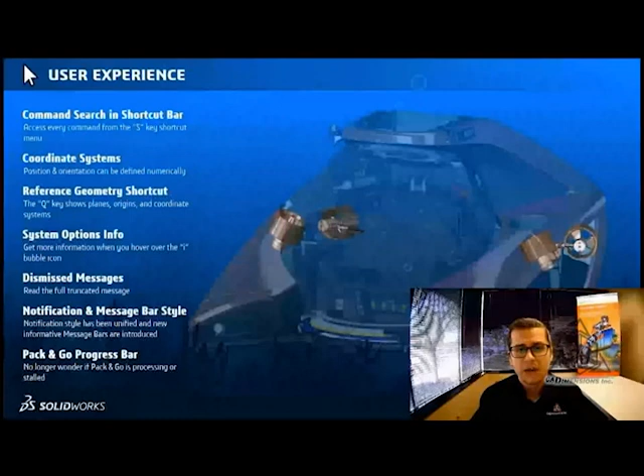SolidWorks 2022 user experience enhancements focus on increasing productivity and usability. In this Nemo submersible model, only one thruster is in place, and we need to accurately place the other thrusters. The S-key keyboard shortcut toolbar now allows us to search for commands, and will even show the tool's location for future reference. We know the location of the thrusters, so a coordinate system would be a great way to mate the new thrusters in place. In SolidWorks 2022, we can now define coordinate systems by numeric input for precise location and orientation.

We have our reference geometry set to hidden so that our workspace is clean. However, easy access to reference geometry is essential. In SolidWorks 2022, a new keyboard shortcut, Q, will toggle reference geometry on. This will quickly give access to assembly or component planes, origins, or coordinate systems.

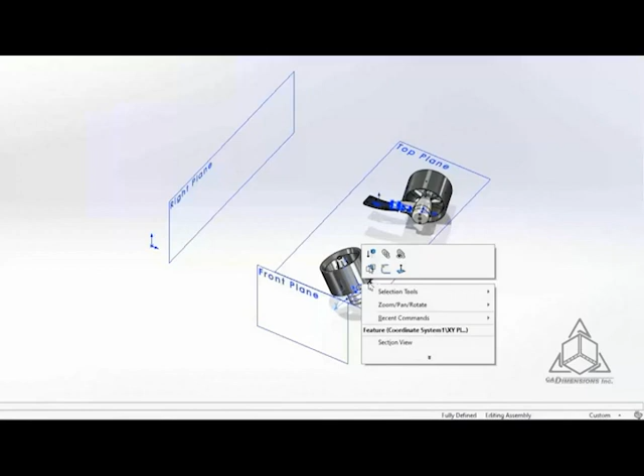Coordinate systems were also updated, visually and functionally. Their axes, planes, and origin points can now be used to create sketches, section views, and other features. Now we need to mirror the thrusters. We can use the S key search bar for the mirror tool, and then easily add it to the shortcut bar for future use. We can also use the Q key while creating this feature to select the mirroring plane.

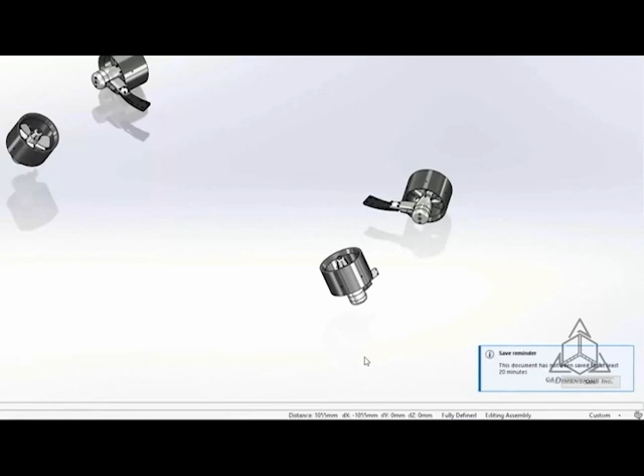The system options have been upgraded with information bubbles that help identify and inform you of the settings function. Dismissed messages have also been upgraded so that you can read the full message pop-up, making it even easier to identify than in previous versions. Notification pop-ups have been overhauled in style and appearance, making them universal throughout the interface. When collecting your project, we always turn to Pack and Go. Now in 2022, there is a progress bar, so we can have a better idea of how long the process is going to take.

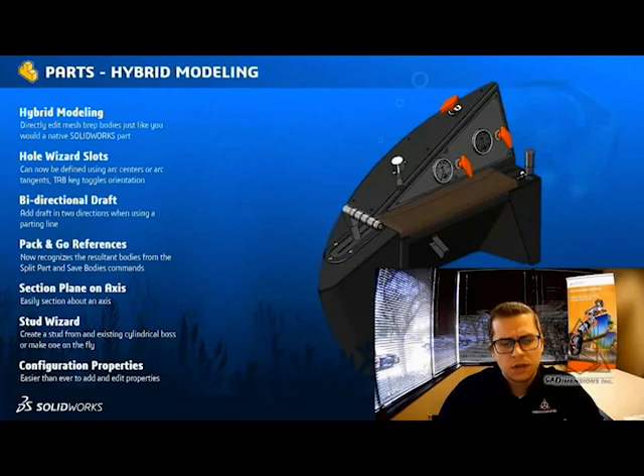And then we get some extra custom property enhancements as well. So let me go ahead and show you how they work.

We're not always afforded the luxury of receiving native SolidWorks files when working with other companies. Sometimes all we have to work with are mesh BREP formats, and in the past this could be tricky at best. SolidWorks 2022 has enhanced the capabilities of working with mesh files, making it easier than ever to edit the geometry.

The ball valve on this current Nemo model needs to be edited. We wanted to make it a bit more fancy for such a luxury product design. You can see the imported bodies are a mesh BREP format, but we can make changes to it as if it was a typical solid model. Creating features like chamfers, extrudes, reference planes, and more no longer require Boolean operations.

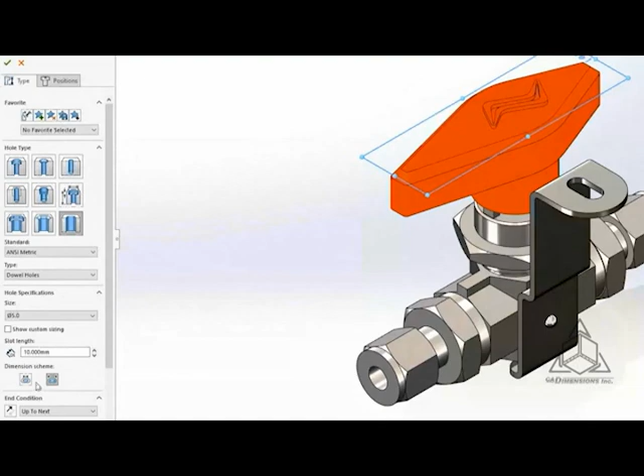Let's add a slot for the lock. The hole wizard slot length can now be defined by arc tangents or centers. Positioning the slot is as easy as using the tab key to change its orientation.

This handle is to be injection molded, so it will require draft. To do this, we will have to create a parting line and add bidirectional draft at that line. In SolidWorks 2022, you can create the bidirectional draft in one feature rather than having to create two parting lines.

Back to the mesh bodies. The manufacturer wants each body as a separate part file so they can access them individually. The Pack and Go function now recognizes the references created with the save bodies and split parts commands. Now you can choose which references you need rather than manually tracking them down in Windows Explorer.

Section views have a variety of uses at each level of the design process. You can now specify a section view from any cylindrical face, conical face, or axis.

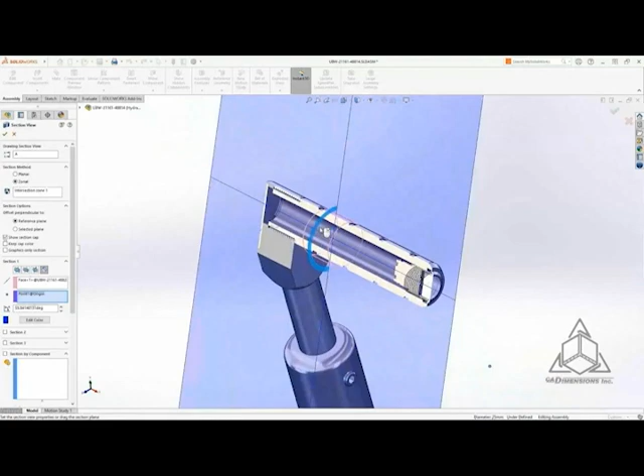These 22mm threads are useful for 3D printing, but are unnecessary for detailing the design for manufacturing. The new Stud Wizard is a great tool for this, as it uses the diameter of the boss and still provides a list of different thread sizes and pitches to use. It even allows you to create an undercut with full control over the dimensions. The Stud Wizard adds cosmetic threads, which look great in 2022, and these can be called out for 3D and 2D annotations.

In SolidWorks 2022, configuration-specific properties have been separated into two tabs, Configuration Properties and Property Summaries. In the first tab, property information is added just like you would expect. Now you can choose which configuration they are applied to using the dropdown. The Property Summary tab provides a useful way to compare configurations based on a custom property.

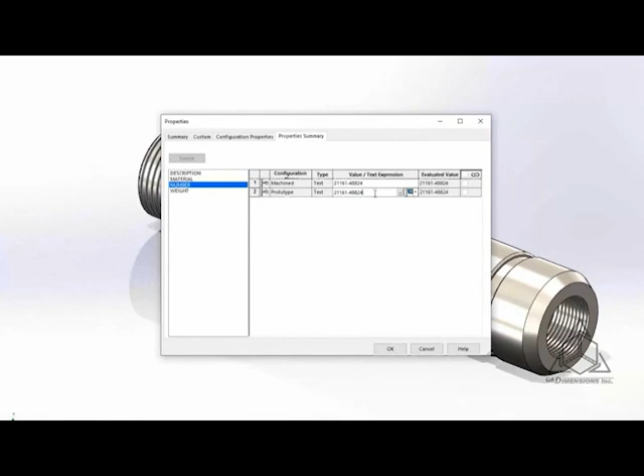Alright, I'm officially impressed. I imagine at least one of those will appeal to every person in attendance today, and we're not even done with the part enhancements. I'm going to take a break from speaking for a minute, and let Steve cover the other half of the part modeling upgrades that we've got. So go ahead, take it away, Steve.

Thanks, Brian. Those really are impressive. So how many of you use SolidWorks to make welded structures? Do you use the traditional weldments module, or do you use the new structure systems? Introduced in 2019, structure systems is a faster way to make welded systems by combining different tools such as structural members, end caps, gussets, and trimming tools into a single easy-to-use interface.

Here are some new features for 2022. SolidWorks makes it easy to create frames and structures with structure systems. 2022 is no exception, with enhancements to secondary members, the introduction of connection elements, and more.

Secondary members are defined using existing structural bodies. This vertical post will be carrying a heavy compressive and bending load, so it will need extra support. Creating multiple secondary members is fast in SolidWorks 2022 now that you can select a point and multiple bodies.

All corner treatments are just as intuitive to define as they have been in the past, giving you full control over your end result. Also new to SolidWorks this year is the ability to define or insert connection elements. These are great for members that are designed to be bolted rather than welded.

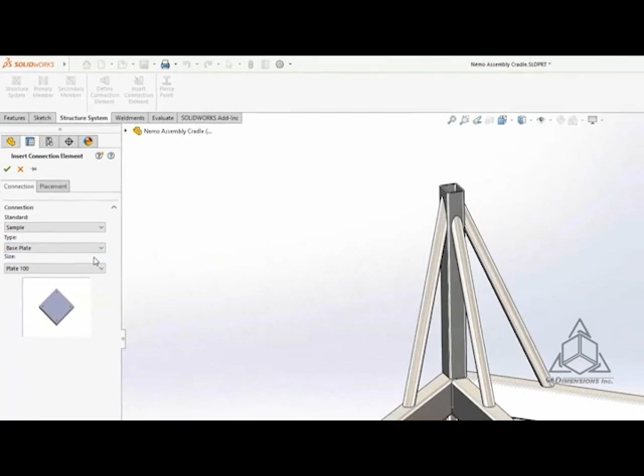These legs require a base plate, so the cradle can be attached to the floor. Just select the members and the plate is automatically centered at the end. If a connection element doesn't meet your design needs, it can be adjusted on the fly. These fork lifting channels may need to be replaced if damaged, so a connection element is perfect for this situation.

Defining the position of the connection element is easy. Simply select the faces of the members, then use the convenient member planes, which reveal themselves automatically, to center the element. The connection element is smart and can cut predefined holes in the members you select.

Gussets and end caps are also now supported for structural members in SolidWorks 2022 and are just as easy to define as before. Mirroring features and components is a very commonly used function.

Now, in SolidWorks 2022, you can mirror across two planes or faces at once. No longer will operations like this require two separate mirror features.

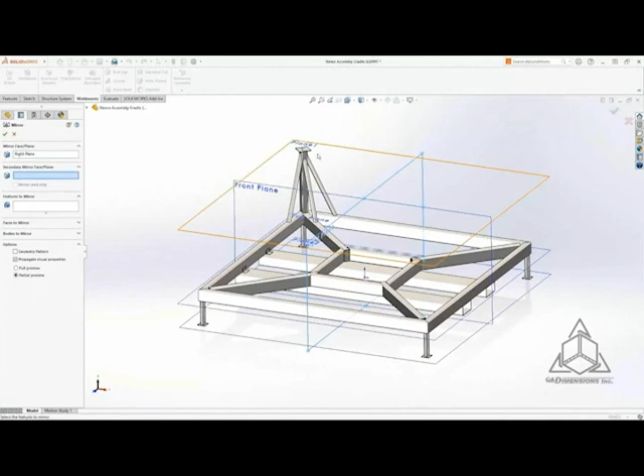SolidWorks introduced the ability to create an edge flange on the circular edge of a non-planar base in 2021. This has been improved to allow you to edit the flange profile directly inside the property manager so that you can specify the exact flange length you want.

Structure Systems is a powerful but flexible tool. With these new enhancements to secondary members, connection elements, mirroring, and sheet metal, creating frames and structures is easier than ever.

Enhancements to Structure Systems allow you to generate weldments more rapidly. Hopefully these new features will have you beaming with envy.

Now let's talk about some new features for assembly modeling. As assemblies get bigger and bigger, opening and navigating them becomes more of a challenge. Now let's take a look at some new enhancements for 2022.

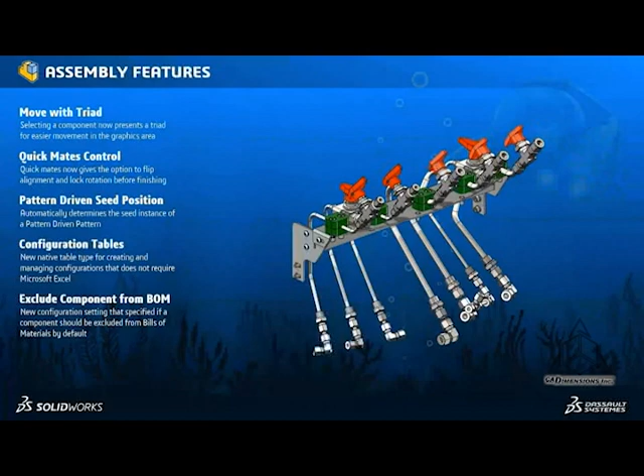SolidWorks 2022 offers faster ways to access your designs from the start. Large Design Review mode, introduced in a previous release, provides a lightning-fast way to open your large assemblies with very few limitations. This large and complex assembly of the Nemo submersible from U-Boat Works with 6,031 components opens in merely 13 seconds, allowing you to get to work faster.

New for 2022 is the ability to easily open drawings from a large design review assembly in detailing mode from the right mouse menu.

Detailing mode is an extremely efficient way to both open and work on your existing drawing documents. Like opening the large assembly of the Nemo, the drawing is opened rather quickly as well, in only 21 seconds.

Detailing mode is a fully interactive way to work with large drawings that have already had their views created. In this environment, you can continue detailing your design, adding dimensions, notes, tables, and more.

The ability to quickly access drawings from large design review mode in this way will streamline how you work with large complex designs.

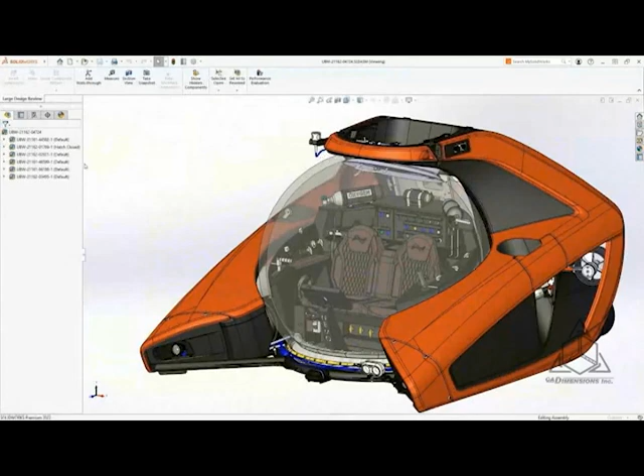Additionally, in 2022, you can open sub-assemblies from large design review mode in this lightweight format as well. This ensures that you're not loading any unnecessary information that's not currently needed.

Whenever you want to access the fully resolved models, you can choose to open them from the same right mouse menu. Likewise, you can always resolve an assembly that is already opened in large design review mode. This ability to access lightweight files and quickly switch between them will ensure that you can work in the most efficient way possible.

Moving components is now easier in SolidWorks 2022. When selected in the graphics area, you're now presented with the triad that makes it extremely simple to get a component into just the correct spot, with controls for X, Y, Z, and rotation all at your fingertips.

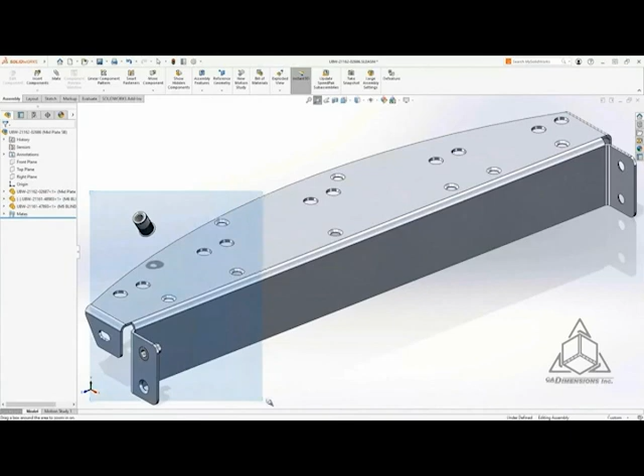The Quick Mates toolbar in 2022 also gives you more control by presenting you with the option to make adjustments before adding a mate, such as the alignment.

This is also true when adding circular type mates, where you'll be given the opportunity to lock the rotation of them before confirming. This is especially useful in the case of mates that allow both of these conditions.

This new ability to add this extra control while mating with the Quick Mates toolbar makes it fast and simple to quickly build your assemblies.

The intelligent pattern-driven component patterns get even smarter in SolidWorks 2022. Now when you choose a component to pattern, SolidWorks will always choose that component's location as the seed for determining how to create and position other instances.

Even if you change the location of the component to a different location, the pattern still assumes that the component you are patterning is in the seed position.

It means it's much easier to take advantage of existing patterns and hole wizard features to quickly position multiple instances of components, such as hardware, and rapidly populate your assemblies.

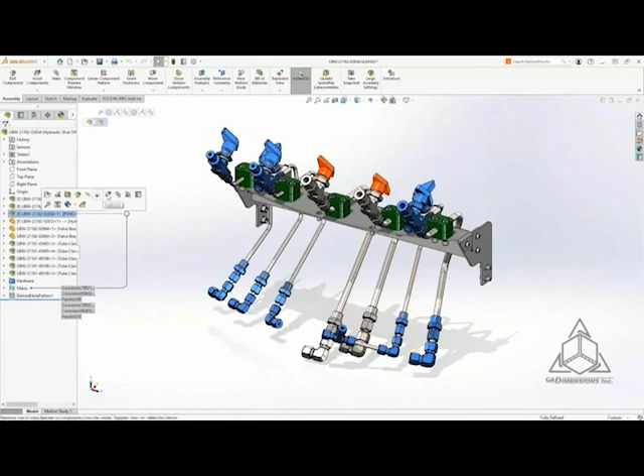Configurations are a powerful way to create alternate versions of parts and assemblies all within a single document. You can choose to have instances of components included or excluded from different versions of the design. You can also choose to use alternate configurations of other components in each configuration. The possibilities are endless, and as more variations are made, keeping track of this can get complicated.

However, new for SOLIDWORKS 2022 is the new configuration table. This table makes it much easier to both create and manage configurations. From the table, you can add new versions to your design, and you can also choose to toggle the suppression state of different components on and off. Likewise, you can specify which versions of components to use in each configuration. The controls make it easy to see your changes as you're working as well.

If you make changes to the configuration manually, such as suppressing components that weren't included before, they will be added to the table as well.

The configuration table also has filters to make it easier to focus on what's important. For example, you may want to ensure that the custom properties for each configuration are unique to each new version of the assembly.

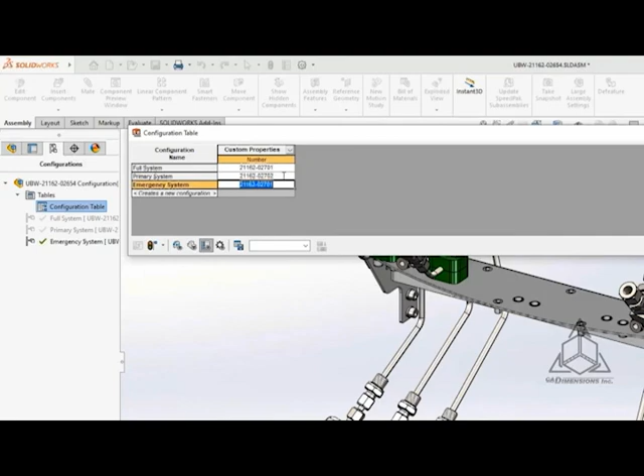Finally, when looking at a bill of materials, there will be cases when components in the design should not be included. This option can be controlled from the component properties in the assembly to specify this.

However, this can become time-consuming for parts that regularly should not be included. New for SOLIDWORKS 2022 is a new configuration option at the component level where you can specify that a component should have this option enabled by default, saving you time from having to change this each time the component is used.

SOLIDWORKS 2022 introduces a wide variety of performance and usability improvements to ensure that you can focus on the engineering of your designs and less time determining how to manipulate them.

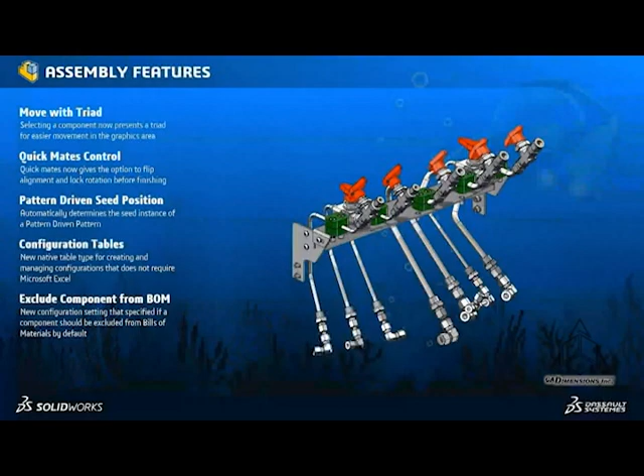Assembly performance has never been better, and SOLIDWORKS 2022 introduces simplified approaches to working with lightweight modes. Pattern-driven patterns are enhanced to give you more flexibility, and the new configuration table enables you to do more with your design without leaving SOLIDWORKS. Back to you, Sarah.

How about now? Good? Okay, sorry about that. Just had to click that back on and off again.

So again, thank you, Steve, for a great presentation. And Brian, who started off the presentation, great job, guys. I was just talking about, if you couldn't read my lips, that the configuration changes were a big highlight for me, being an old design table person. Also the weldment side of things, I thought that was great. So a lot of good information going on in the chat.

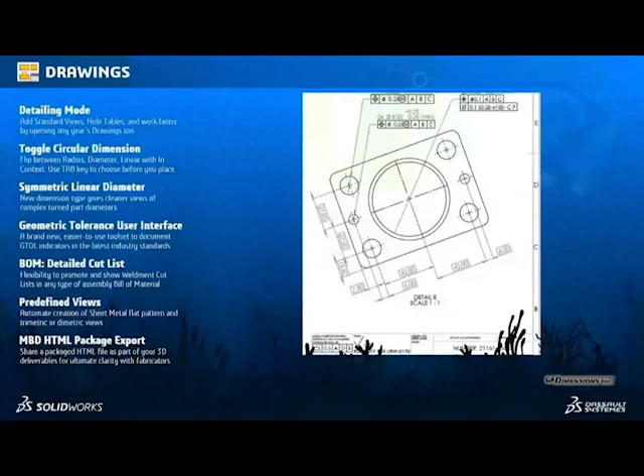Companies like U-Boat Works need to build it right the first time. That means clearly communicating through SolidWorks drawings, and sometimes these files get huge. For 3 years, detailing mode has been evolving. You can open even your largest prints in just seconds and work on them without the overhead of loading any parts or assemblies, or even having them on your machine.

Add and edit notes, reposition annotations, snap in a missing balloon, organize sheets, add dimensions, set tolerances. New in 2022, you can insert hole tables and standard views from the View palette, and when you're done, you can save, even print, a completely accurate PDF.

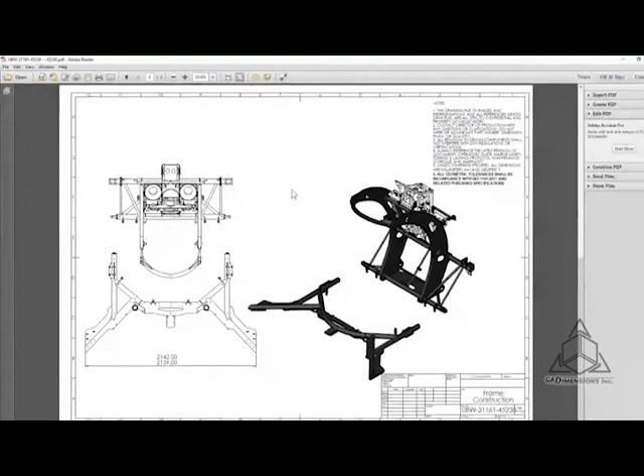What about older drawings that haven't been accessed in years? In 2022, SolidWorks has extended the ability to open any prior version drawing right into detailing mode. This is great because you'll always be able to open a drawing even if you don't have the reference models.

So what else is new with drawings? How about a new in-context menu? This pop-up lets you toggle a circular dimension, diameter, radius, or linear. For turn parts, the new symmetric linear diameter dimension will come in handy.

These are diameter dimensions, which I can apply in a single click to a silhouette edge, or in batch with multiple axis mode. This new annotation type allows for a clean section view by eliminating redundant leader lines.

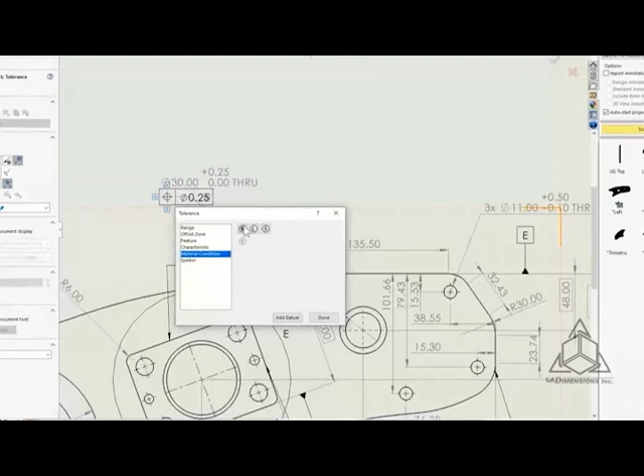Geometric dimensioning and tolerancing allows functional definition of component features and allowances, so I can clearly illustrate manufacturing intent. SolidWorks 2022 introduces a brand new interface to define geometric dimensioning tolerancing indicators. The intuitive step-by-step input is easier than ever.

Specification, zone, feature, filter, characteristic, modifier, and datum references. Add adjacent and auxiliary indicators, text, create stacked and composite indicators as well. Even erase your mistakes. In a design like this, I have many unique weldment parts, each with its own cut list.

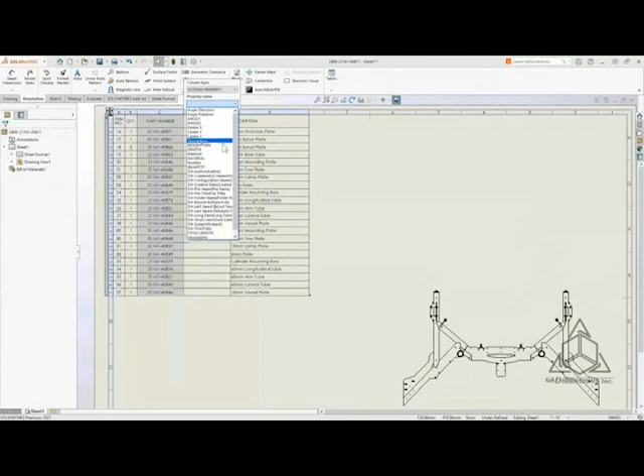This is rich data, but how do I roll that up to one assembly level table? With SolidWorks 2022, the detailed cut list option is available for bill of materials of all types. This means you can aggregate multiple cut lists into an assembly bill of material, providing you with more flexibility and depth of control.

Predefined views are useful to give new drawings a standardized layout. Now in 2022, the flat pattern view is available, and there's a new option to toggle bend lines visibility, increasing your ability to automate documentation of sheet metal parts.

Proper documentation is a key component of bringing your designs to life. Add clarity to your drawings, share your intent, and finish these tasks faster with SolidWorks 2022.

A redesigned geometric dimensioning and tolerancing interface lets you work faster and more intuitively. You can open any drawing in detailing mode directly from your large design review assembly. Weldment cut lists are now available directly in your bill of materials.

Now let's take a look at some of the new features for importing in 2022. Exchanging data has always been key to working with customers and vendors, especially as our workload expands outside of traditional mechanical engineering, even into architectural projects. SolidWorks is already the Rosetta Stone of the CAD industry, able to import and export more formats than any other program. Let's take a look at some of the enhancements for import in 2022.

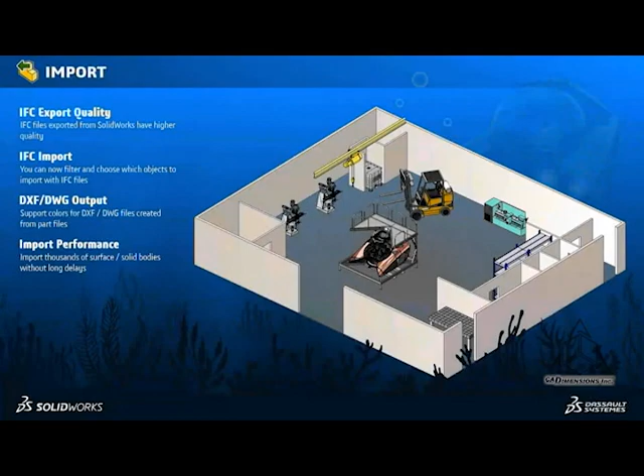When collaborating with others performing design work focused on architectural spaces, often you need to share your data using alternative file formats like IFC. SolidWorks 2022 has focused on improving both the efficiency and reliability of saving IFC file formats out for other design tools to use. Additionally, 2022 has improved its flexibility when reading IFC files as well.

Now when you open an IFC file, you can choose to filter specific object types to import, avoiding the need to open unnecessary geometry and focus on just the information you need to work with. For example, your task may only require walls, floor, and furniture within the building.

All of this means the imported files both open faster but also do not contain overly complex geometry for specific design tasks that you need to perform when working with the IFC data.

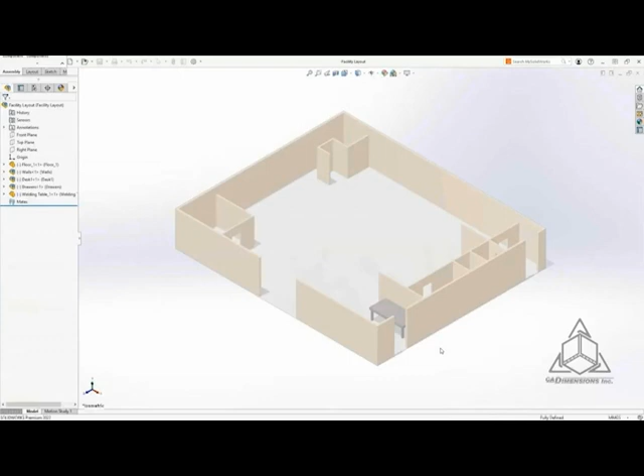Also new for SolidWorks 2022 is the ability to better support the export of DXF and DWG file formats from part files. Components often contain color information that's important for manufacturing processes, such as the color of sketches, bend lines, and other information. Now when using export to DXF DWG from a part file and enabling these objects, their colors will be honored in the output file. This is extremely valuable for downstream operations where colors can represent different manufacturing processes or parameters for NC tool equipment.

SolidWorks 2022 has improved the way you can collaborate with others by improving the overall import and export experience to various file formats. Open DXF and DWG files into a part sketch and import even the largest step files more quickly. Enhanced filtering when importing IFC files allows you to bring in only what you need.

Now Brian will show us some new graphics features for 2022. Take it away, Brian.

Thanks, Steve. Great presentations. I'm personally very excited about the performance increase to imports. It goes hand in hand with the mesh bodies conversation from before, when we don't usually get to choose what file types we're getting from other vendors. So it's exciting to see that performance on this topic took a front row seat in 2022.

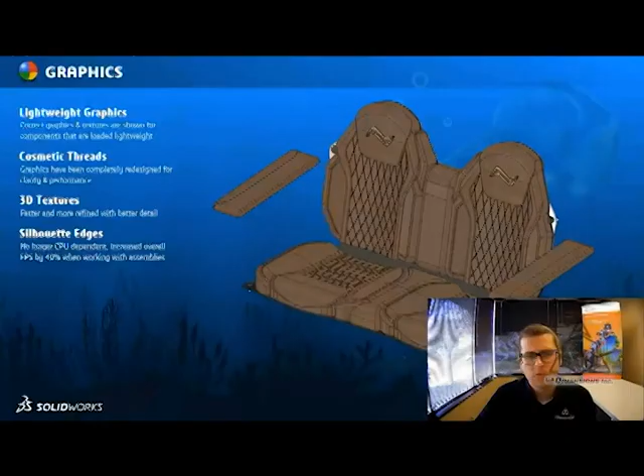For our next topic, we're going to discuss graphics, and graphics are an integral part to SolidWorks and all CAD systems. It gives us the ability to virtualize our product on a computer screen, so it's quite important. Some of the improvements we're going to see this year is how appearance data is handled with lightweight components, so we'll take a look at that.

Texture-based cosmetic threads, which we sort of touched on before, but we'll actually look at that in this section as well. We have increased capabilities of 3D textures and an increase in graphics computing performance for silhouette edges, which will affect everything in SolidWorks, so that's good to see. So we'll go ahead and switch over to SolidWorks to take a detailed look.

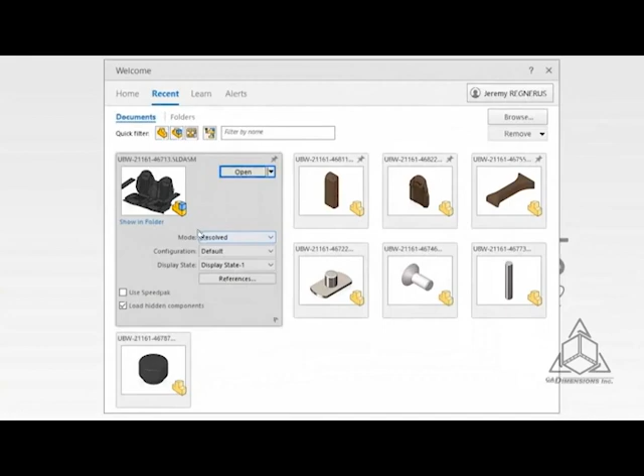Cosmetic and appearance changes happen regularly throughout the design process. Understanding and updating these changes should happen regardless of when or how you open your files. SolidWorks 2022 now automatically resolves lightweight components that have had graphical or appearance changes, regardless of whether any feature has been changed since the components were last saved. This ensures that your components will always appear correctly.

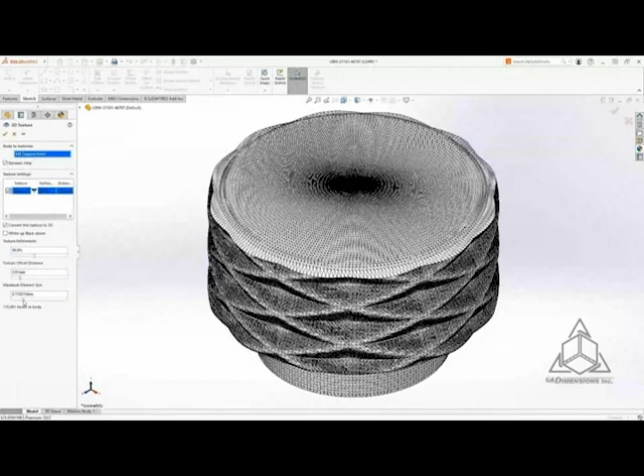SolidWorks introduced a unique and simplified way to incorporate complex textures within your designs in a previous release. By leveraging unique appearances on faces, bodies, or components, textures can be created on those surfaces to generate complex geometry quickly. SolidWorks 2022 delivers increased performance and responsiveness when creating these oftentimes complex and highly detailed textures, meaning you can use them in more places without sacrificing performance.

Another graphical change in SolidWorks 2022 is the introduction of texture-based cosmetic threads. These new cosmetic threads, beyond looking great, make it much clearer to understand which components have threads on them. These threads will be used for any type of feature that includes cosmetic threads as well, from manually creating threads to the new stud feature and, of course, the hole wizard.

Finally, performance is always critical to saving you time. SolidWorks 2022 has increased the frame rate when rotating parts and assemblies with silhouette edges by over 40%, saving you time with every single zoom, pan, and rotate.

Again, another great set of enhancements. As a tech support engineer, the cosmetic thread enhancement is a massive upgrade. They look so good and have such low overhead on the model. It's really just awesome. I'm going to go ahead and pass it back to our host for a bit, but I'll be back shortly to discuss administrative image enhancements. Back to you, Sarah.

What the heck? What?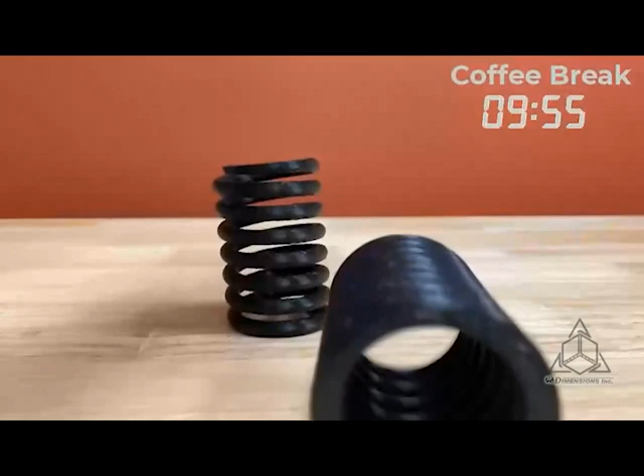Today we're talking about one of the most unique FDM materials, TPU. TPU is a resilient thermoplastic polyurethane with excellent flexibility and stretch and resistance to abrasion and tearing.

This FDM TPU 92A from Stratasys is compatible with the F370. It uses QSR soluble support, and like Diran, it's very moisture sensitive and should be stored in a dry box or sealed container. Let's talk about some mechanical properties.

This TPU has a tensile strength of 16.8 megapascals, an elongation at break of 552%, a tear strength of 84.6 Newtons per millimeter, and a hardness value of 92 Shore A.

TPU is one of the most challenging FDM materials to print with. The TPU from Stratasys provides a superior alternative to less optimal TPU 3D printing technologies. It prints great, and with the large build volume of the F370 and QSR soluble support, it makes it great for a wide variety of prototyping applications.

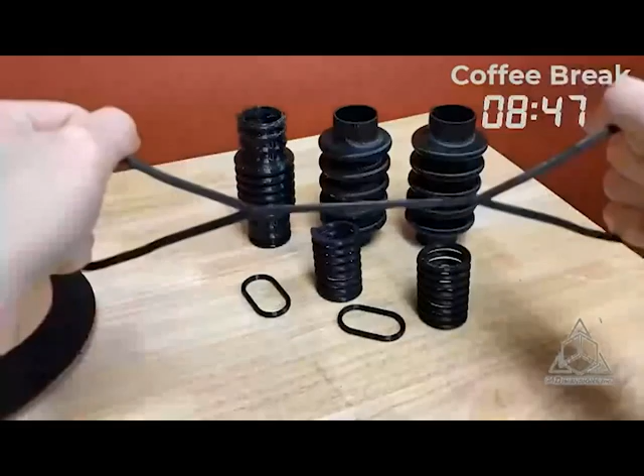Applications include flexible hoses and tubes like you see here, air ducts, vibration dampeners, gaskets and seals, and other complex elastomer parts.

Here at CAD Dimensions, we're big fans of golf, whether it's played with a disc or a ball. So, using TPU, I printed a disc and a grip for a golf club.

I was very happy with how these prints came out, but since this TPU has a Shore value of 92A, I think it makes a better disc than a grip. Nevertheless, they were fun parts to make.

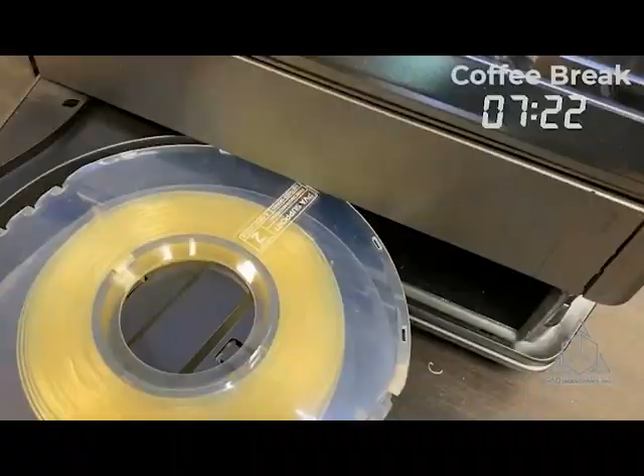They print using PVA support, a water-soluble support from MakerBot, and like all nylon-based materials, they are affected by moisture and should be stored in a dry location. Nylon CF has the highest peak performance in all categories and is significantly affected by moisture, while nylon 12 CF will retain its performance in the presence of moisture.

The carbon fiber materials with the MakerBot Method are great for small to medium-sized prototypes, jigs and fixtures, and end-use parts. The next machine from Stratasys that can print carbon fiber materials is the F123 series, and that material, one of the newest from Stratasys, is ABS CF10.

ABS CF10 combines the benefits of carbon fiber filament with the desirable mechanical properties of ABS. The ABS is filled with chopped carbon fiber at 10% by weight, and it's great for applications such as jigs, fixtures, and other factory floor tooling.

This material can replace metal for lighter, more ergonomic tooling. It prints using QSR soluble support, which means complex geometries that would normally be impossible to machine are easy. Since carbon fiber material is abrasive, it uses a dedicated CF head.

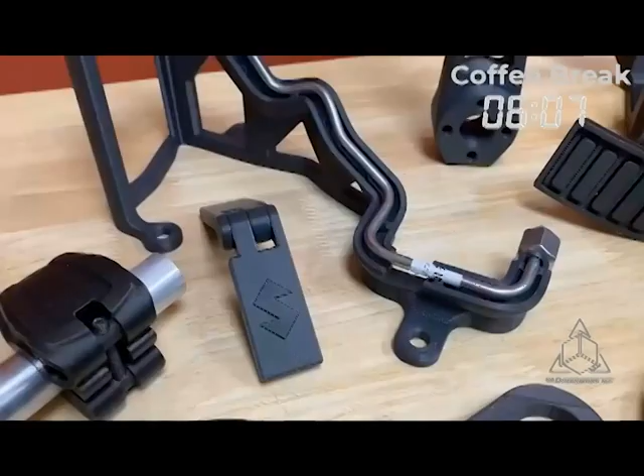Here are some parts printed in ABS CF10 on the F370. First, I have this alignment fixture for a metal rod, and I also printed this robotic leg. These parts are lightweight, very strong, and durable.

The next two printers that have carbon fiber materials are the Fortus 450 and F900. And just like the MakerBot, that material is nylon 12 CF. This material can achieve the highest flexural strength and stiffness to weight ratio of any FDM material. It prints using SR110 soluble support, and just like the F-Series, it has a dedicated CF head.

You can validate designs faster with functional carbon fiber prototypes instead of costly and time-consuming metal prototypes. Like the other CF materials, additional applications include jigs, fixtures, end-of-arm tools, low-volume production, and highly customized parts. Here I have some parts printed on the Fortus 450 in nylon 12 CF.

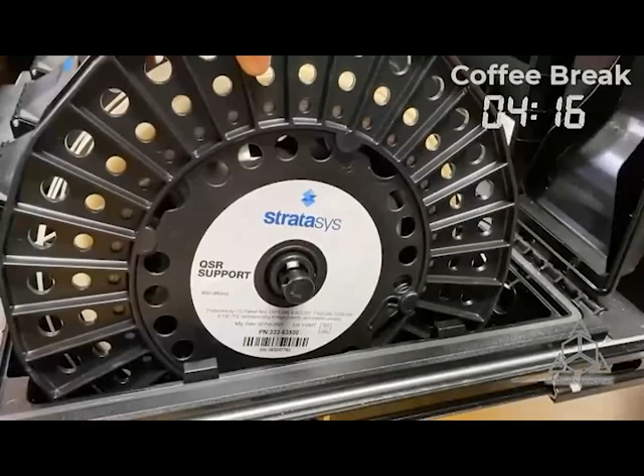The other ESD-safe material available on the Stratasys FDM printers is Antero 840 CN03. Antero 840 CN03 is a high-performance PEEK-based thermoplastic with ESD properties. It's available on the Stratasys Fortus 450 and F900. It uses a breakaway support system called SUP 8000B.

It has an ultimate tensile strength of 95 megapascals, a volume resistivity of 10 to the 4th to 10 to the 9th ohm centimeters, and it's very resistant to both heat and chemicals.

Applications for Antero include prototypes, ESD-safe jigs and fixtures for testing and assembly, and low-volume end-use parts with strict requirements. With Antero, you can produce highly customized, low-volume parts with consistent static dissipative properties, high chemical resistance, and ultra-low outgassing. This makes it great for industries such as aerospace and automotive.

Electronics housings are a great example of parts you'd want to be ESD safe. So I printed this Raspberry Pi housing on the F370 using ABS ESD7.

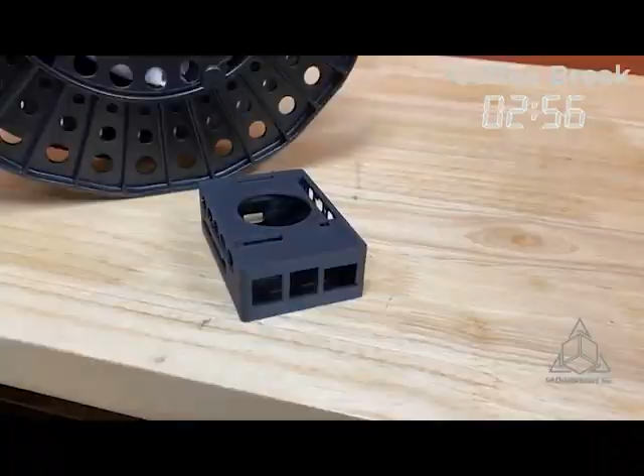Thanks for watching. Hi, I'm Matt Corcoran, an application engineer with CAD Dimensions, and this is our FDM materials series. I'll be covering some of the most unique materials available on the Stratasys FDM printers.

Today we're talking about Diran. Diran is a nylon-based thermoplastic used in 3D printing. It's very durable and tough and resistant to hydrocarbon-based chemicals. Diran also has a very smooth surface finish, which is perfect for non-marring factory floor tooling, such as this end-of-arm tool here used on the end of a robot to pick and place parts without damaging them.

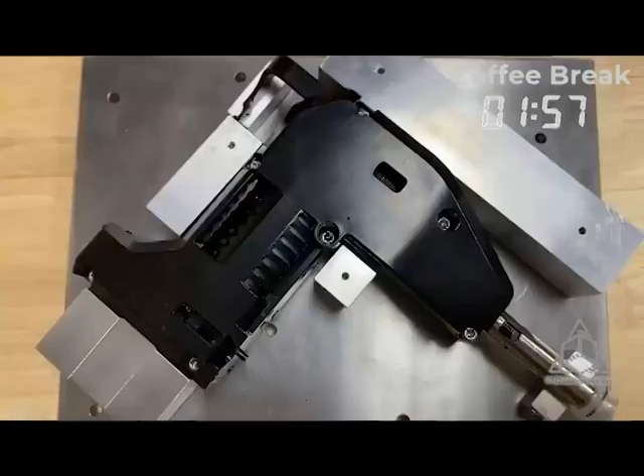Other applications include jigs, fixtures, prototyping, and low-volume production of highly customized parts. This inspection fixture for an F-Series head is a great example of a part you'd want to replace with Diran. It's usually made out of aluminum, which is very heavy, expensive, has a long lead time, and can damage the part you're trying to inspect.

Like most FDM materials, Diran can be painted, sanded, machined, and media blasted. Diran can be printed on the Stratasys F370, and it uses a breakaway support system called SUP 4000B. It also is printed on a high-temperature build tray.

Due to its smooth surface finish, one of the fun things you can print with Diran are air hockey parts. I printed these 4 parts all in the same build tray, and it took about 20 hours to print. Overall, I was happy with how these printed. I printed them with a 10 thou layer height and a double dense infill.

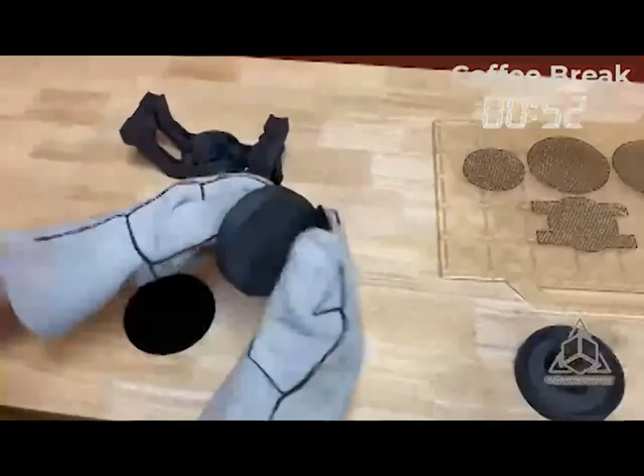One thing to note about Duran is it is very moisture sensitive, so it's important to store it in a dry environment. However, the spool can be placed in the printer overnight to dry it out. The material used here had a bit of moisture in it, which caused some surface defects. Also, Duran prints very hot, so be sure to wear gloves when handling the parts in the tray right out of the printer.

So here's some footage of us playing air hockey with these parts. There you go, now we're getting it down.

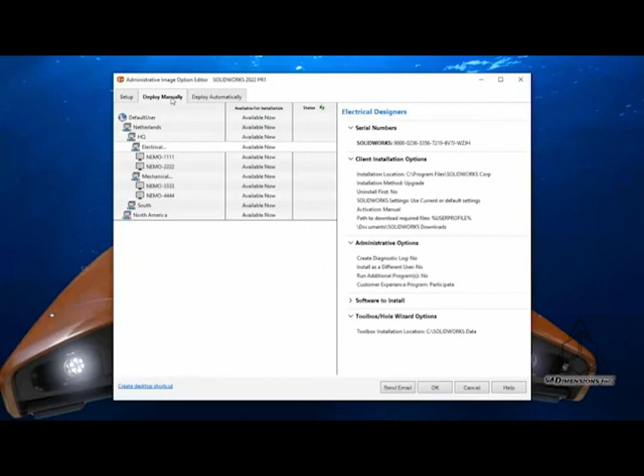You can still choose to deploy manually or automatically, and of course these tabs reflect the nested structure of the setup tab, making it convenient to deploy to the correct users or groups.

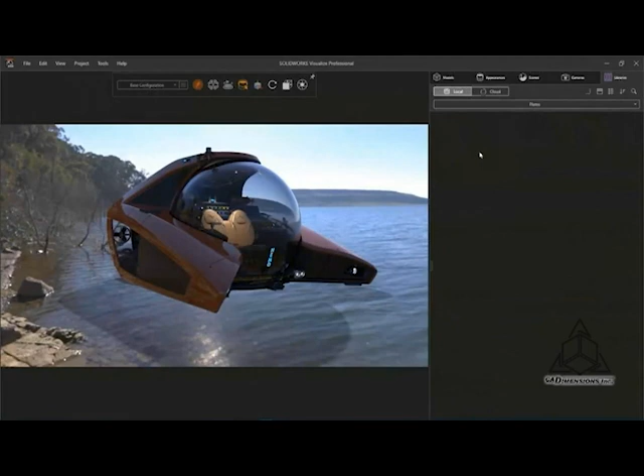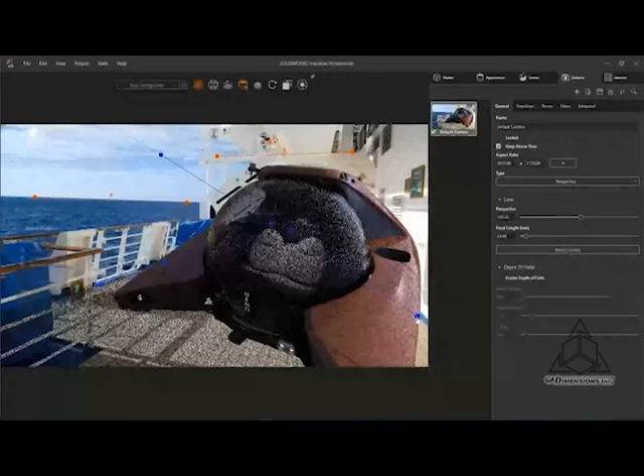Since 2D stock images are easily accessible and come in all shapes and sizes, these can add the perfect touch to any rendering, but traditionally require a trial and error process to align the model's perspective to that of the background image itself. Visualize 2022 simplifies this process dramatically with the new match camera capabilities. Using the 2-point perspective of the horizon and the ship's structure, along with the ship's walkway, the camera's focal length is calculated and applied to the 3D geometry. This builds additional photorealism into the project by seamlessly integrating the 2D image and the 3D model.

Now that the model is placed nicely, we want to make sure the environment's light sources interact correctly with the background image. We've always had the ability to rotate your environment to get the shadow's direction correct. But in situations like this, the shadow doesn't interact with the ship's wall. Details like this can make or break a rendering. This is no longer a problem in Visualize 2022.

We can use the primitive geometry tool to insert a vertical plane to act as a wall. Now in 2022, we can convert this wall's geometry to a shadow catcher. This gives the geometry the ability to interact with the shadow, but it will be invisible to the rest of the environment.

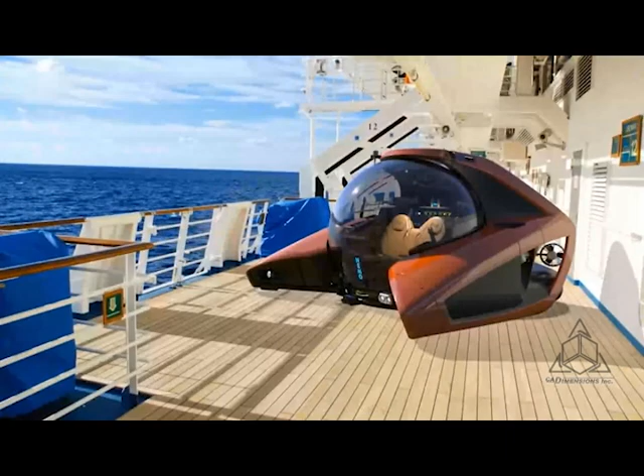For the next image, we want to capture the Nemo in its natural habitat, which is underwater. Leveraging configurations and additional cameras in Visualize is an easy way to keep all your renderings in a single project. For an underwater shot, updating the HDR environment and the background image from the library assets is just a drag and drop. As we saw before, it's important to replicate the scene lighting as close as possible.

This time, an additional area light is added by switching to the top view and using the Add to Match camera to create the light source.

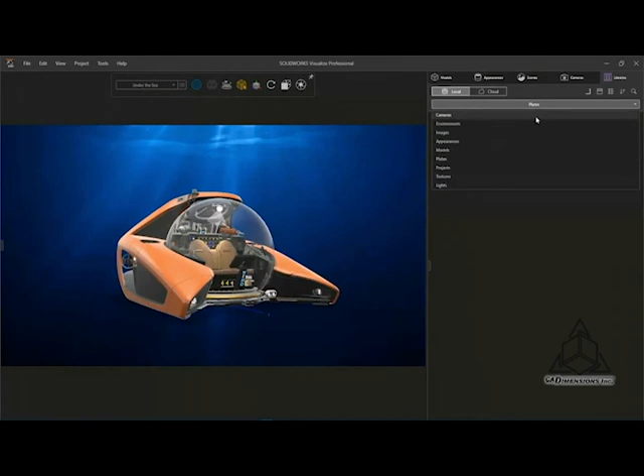At any point, you can switch between live rendering or preview mode. This is an easy way to manage your system performance when setting up your project, such as adding and positioning additional 3D assets. For this image, including a blue line snapper adds a nice touch.

But what about a school of fish? Previous versions of Visualize had the ability to create model formations, but required 2 or more instances. New in SolidWorks 2022, patterns can now be created from a single instance, and with the scatter feature, randomizing these fish by defining the number of instances, along with the bounding box parameters, makes this process a snap.

For the final rendering, a third configuration is created to capture an exploded animation of the Nemo. With the timeline enabled, groups are selected and keyframed to define their start and end positions.

Going through this process of keyframing multiple parts and groups can quickly clutter the timeline. Now in Visualize 2022, items added to the animation timeline can be nicely organized into folders using the group options. The animation ribbons can also be color-coded, making it easy to find and reposition these keyframes into the perfect place.

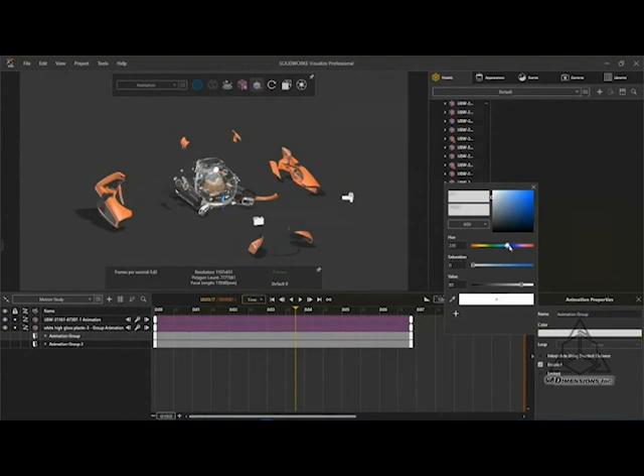The first camera is all set with a wide-angle perspective and is keyframed into the timeline. A single camera can capture the action, but multiple cameras really brings on a professional touch. You can easily repeat the process of introducing additional cameras and keyframes to your animation with just a few clicks.

Moving ahead, we can see 3 cameras created. Visualize 2022 offers a much more direct approach to allow camera switching from one camera to the next. By creating a camera group in the timeline, you are able to keyframe in which camera you'd like to have active and when, skipping the need to create additional edits in third-party editing applications.

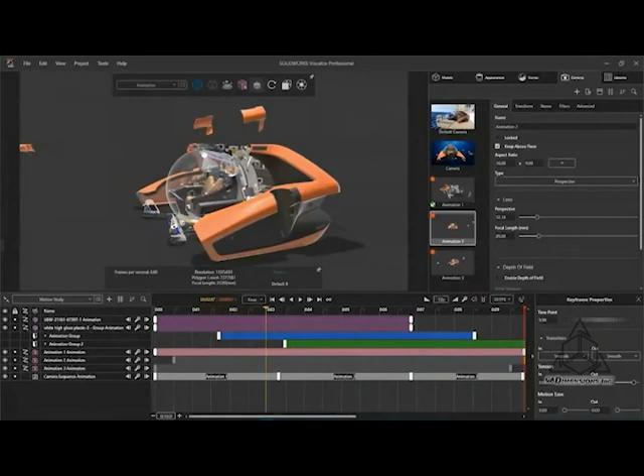Going back through each of these 3 configurations, everything looks good and the final render process can begin. As progress moves along and each rendering finishes up, Visualize 2022 offers a new, updated output viewer to keep your projects even more organized. Render settings can be reviewed, and the project can be canceled or re-rendered as needed. And best of all, project outputs are referenced and the final deliverables can be opened.

Year over year, SolidWorks Visualize takes advantage of the latest rendering technology and simplifies it for every user. Generating world-class sales and marketing collateral like we see with the Nemo has never been easier. As you can see, Visualize 2022 puts the ability to create professional level marketing content in the hands of everybody. If you're not using Visualize yet, I'd say 2022 is a great year to get started and take your product designs to the next level.

Whether you're working with in-house or outsourced manufacturing, monitoring and verifying critical geometry is key to ensuring consistency within your products. Let's see how SolidWorks Inspection 2022 continues to simplify and automate QA operations.

The standalone version of SolidWorks Inspection has historically relied on 2D PDFs and image files to start the ballooning process. Now in 2022, support for additional file types has been introduced, including NX and the much anticipated native SolidWorks drawings. Here you can start the project off by importing a SolidWorks drawing directly into the standalone application, and then extracting relevant part information such as part description, part number, and current revision.

The same smart extraction method is used to gather dimensional and tolerance characteristics needed for this report. From the title block, an additional surface profile tolerance note is additionally ballooned and extracted with just a simple click. You'll see SolidWorks Inspection identifies the GD&T symbol, precision, and geometric tolerance indicators, which will all be carried downstream into your first article or in-process reports.

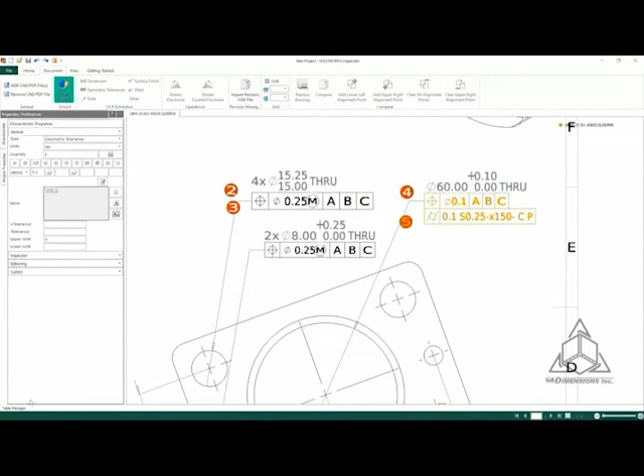Continuing through the extraction process, hole callouts and geometric tolerances are ballooned and then remapped to the project's bill of characteristics. Investigating Balloon 5, which is home to multiple dimensional requirements, SolidWorks Inspection automatically identifies each and has broken them into sub-balloons as shown in the table.

Repeating these simple steps for the required tolerances and dimensional callouts is a breeze. No manual data entry is required. But what if we wanted to better communicate this information from the 3D part itself?

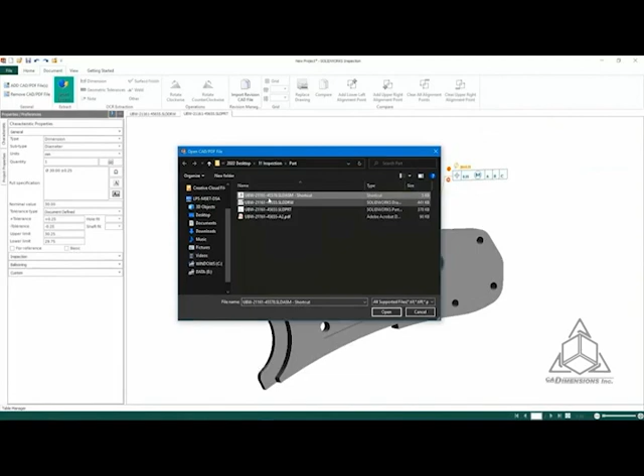SolidWorks Inspection 2022 has dramatically improved the performance and support for SolidWorks part files, which can be directly added into the inspection project alongside the current 2D sheet. The extraction process is the same as in the 2D drawing, pulling in and identifying the geometric tolerance and positional information, but now ballooned onto the 3D part.

During the assembly of this bracket, a few critical welds along with some surface requirements are also required to be inspected. Inspection 2022 now fully supports importing SolidWorks assemblies to ensure proper fit, form, and function with all manufactured and assembled items. With a bill of characteristics created, this package can now be saved with all the associative 2D and 3D data without having to access any of the drawn parts or assemblies inside of SolidWorks CAD.

The inspection reports can be generated and include both 2D and 3D PDFs, along with the necessary Excel documentation. SolidWorks Inspection is also available directly inside SolidWorks itself as an add-in, and new in Inspection 2022 is full support for API. This highly requested enhancement helps to automate the creation, ballooning, modification, extracting, and exporting of first article and in-process inspection reports.

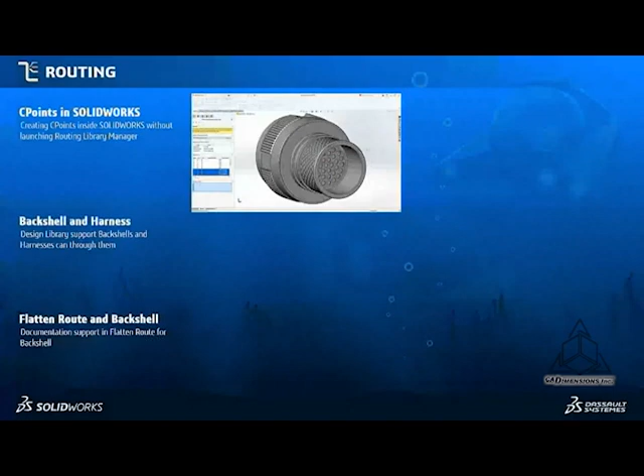When you go deeper into the beautiful unknown of the underwater world and rely on your power, oxygen, and navigation, electrical design plays a big role. In SolidWorks, we bring multidiscipline engineering into one ecosystem. Creating electrical information for a SolidWorks part does not need to be a long, drawn-out process.

Adding connection points inside SolidWorks became even easier because they can be done inside SolidWorks by going to Tools, SolidWorks Electrical, where you can select Create CPoint from Manufacturer Part. In this dialog, it remembers the last manufacturer part that was used, or you can browse and select a different part from an extensive library.

The terminal list shows the list of connection points that need to be added. Selecting a point or an edge in SolidWorks updates the table, and selecting OK will add these terminals to your part.

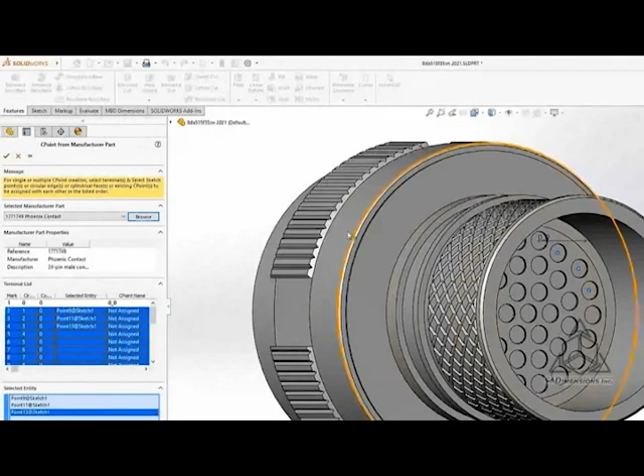Going back to Tools, SolidWorks Electrical, Create CPoint from Manufacturer Part reveals what terminals have already been placed with the remaining list left to do. The ability to select the point or edge in SolidWorks to add the connection point allows you to quickly create electrical components right inside of SolidWorks. Less time creating parts and more time designing.

How would you protect the junction between contacts and wires to eliminate electrical failures? Backshells are used in this application, and SolidWorks now supports them.

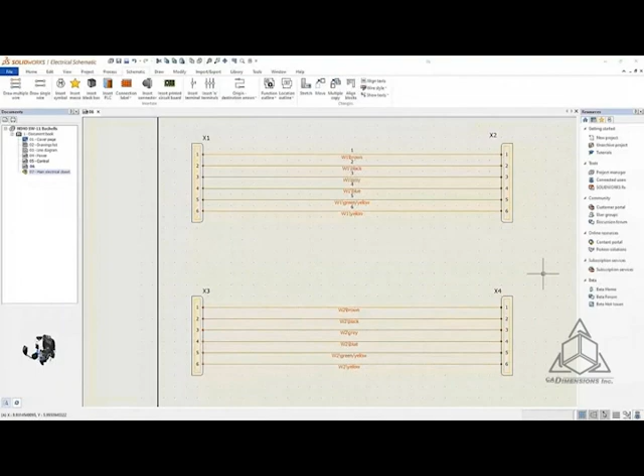2 harnesses from the battery to the control panel and external plug are created in SolidWorks Electrical Schematic. In SolidWorks Mechanical Design, these 2 harnesses are routed. Now that the routes are in place, you can address the wires and contact protection.

Adding back shells to the connectors removes the stress between the contacts and the wires. Back shells are available in the design library under the Routing Electrical Inline Components folder. A 45-degree spin coupling was used and mated to the connectors.

One more connector with a back shell will need adjustment of the harness to go through the back shell. Edit the harness that is in red and select the body of the back shell. From the right mouse button, choose Edit Route Alignment and select the spline of the harness and the axis of the back shell. The harness adjusts and routes right through the back shell.

Efficient use of these components during design will protect the junction between contacts and wires, eliminating downstream manufacturing delays and costly redesigns.

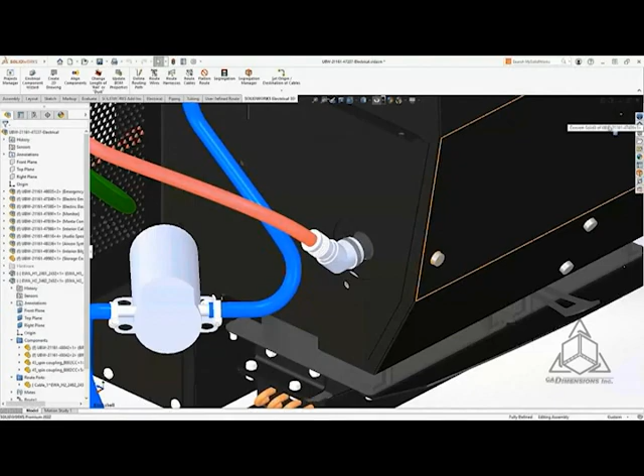Creating harness drawings and tables manually takes time and can be error-prone. Flatten Route in SolidWorks automates this process and now supports backshell components.

Flattening this red harness will include backshells along with the harness and connectors in its 3D position and will show them in appropriate locations. In the Flatten Route dialog, choose what detail of documentation you will need to include, like manufacturer, display 3D connectors, and a checkmark for drawing options.

Choosing OK produces the harness drawing with connectors, backshells, tables, and callouts automatically and saves time for engineers to tackle other technical challenges. The SolidWorks ecosystem lets you quickly create electrical information for components, add and manipulate backshells for contact and wire protection, and create flattened harness drawings that include backshells.

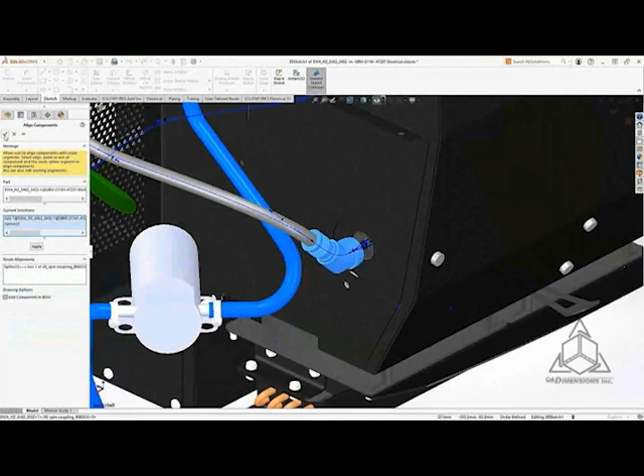New electrical components come online and engineers need to use them. Instead of creating them, you can search and download them using the new Electrical Content Portal, or ECP, for SolidWorks Electrical Schematic. You can still use a web browser, but new is the ability to run ECP directly in the task pane of SolidWorks Electrical.

In the View tab, select the ECP icon. In the ECP, you can see what the newly added items are and what sections are updated.

Let's search for WAGO libraries and you will get the list of libraries available for download. PLCs have different libraries and one that you may need has different sections, like 2D footprints, symbols, and manufacturer parts.

Productivity enhancements like running the ECP inside of SolidWorks Electrical give you the flexibility to choose the most effective way you want to work. Alright guys, we got a lot of really cool stuff coming this year from routing and electrical, so let's kick it back to Sarah to talk about the new 3D Experience platform.

Awesome. Thank you, Stephen. I'm really glad those two topics were able to run in parallel. Come on, those are good. Another electrifying presentation. Alright, Jimmy's ready to pull me off the stage with a cane. So the next thing we have—I know they are terrible, Jesse, I agree. Pull the plug, yes, keep them coming. I love them. Electrical puns are the best.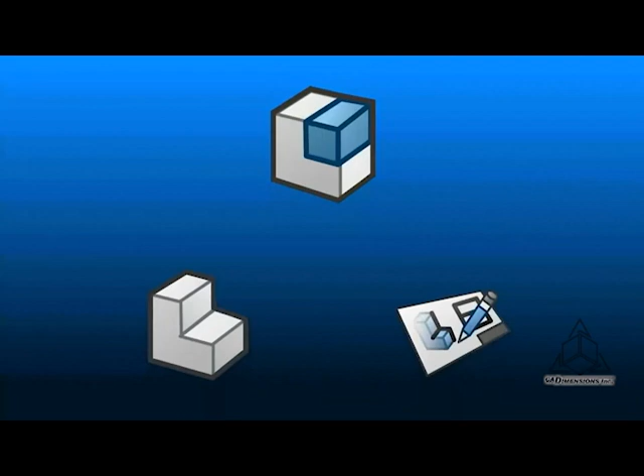Whether you work in a large organization or just a small team, no doubt you're concerned with storing, managing, and collaborating on your design data. And it's tricky because SolidWorks parts, assemblies, drawings, and other supporting documents are all linked. Consumer cloud storage apps don't know how to handle that. Maybe the investment in SolidWorks PDM and Manage isn't right for you.

There is another way. When you connect your SolidWorks to the 3D Experience platform, cloud data management is just a few clicks away.

Eric Engineer and Debbie Designer are part of the team working on the Nemo submersible. They are on a tight deadline to finish up the hatch design. Eric puts the finishing touches on the latch mount by inserting fasteners from SolidWorks Toolbox. A quick check on the assembly drawing, and everything is up to date and ready to save to the cloud.

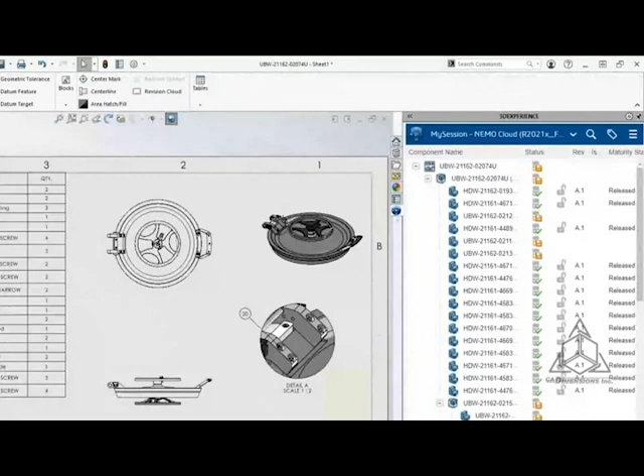First, he logs into the 3D Experience platform. It's his team's secure connection to the cloud. Right from the task pane, he sees the status of his work. These indicators show which components need to be saved.

As for the hardware and other standard parts, SolidWorks is configured to automatically catalog and release these items, so all users can access their shared libraries online.

The Save dialog shows exactly which items require an update. You can also assign any item to a bookmark, such as related drawing files. Out of a long list of components like this, bookmarks are a convenient way to flag them for easy access.

Only the new or changed items need to be uploaded to the cloud. This makes efficient use of network bandwidth, but still ensures everything is up to date.

As a leader of his team, Eric is able to release his own designs. Easy-to-use life cycle operations like this help the team avoid accidental overwrites.

Switching over to his bookmark tab, he sets the related parts and assembly drawings to released. It's just two drawings for now, but as the detailing work continues, the bookmark will keep everything organized for quick access.

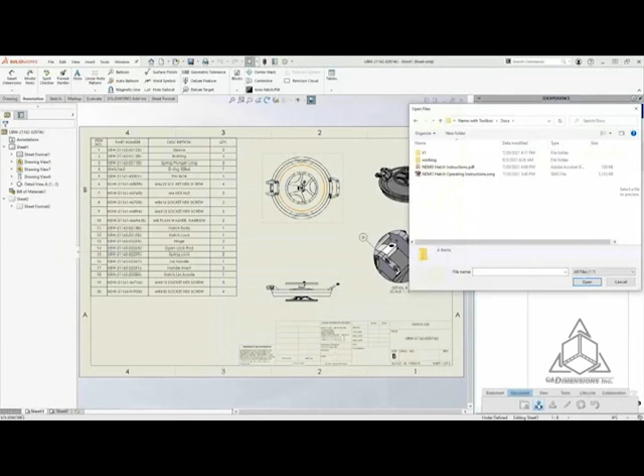That includes any other supporting documents like this PDF instruction sheet and the related SolidWorks Composer file. Most document types can be previewed interactively with the SolidWorks task pane. No need to launch external viewing apps.

Eric also has a backlog of finished designs that also need to be uploaded to the cloud. He can automate this with batch save. He just selects his local design folder and assigns them to the appropriate cloud space. SolidWorks takes care of the rest.

As the Nemo sub design evolves, the team must respond quickly to change orders. Debbie logs into her session and sees a message from Eric requesting a change. A quick keyword search shows several results. This one looks right.

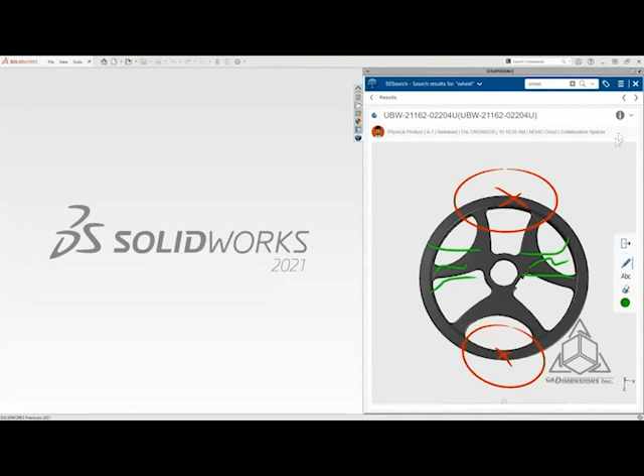Debbie uses the 3D annotation tools to quickly sketch out a couple ideas. From here, she opens the part in SolidWorks. The latest version is automatically retrieved from the cloud.

Before she makes any changes, it's best to do a where-used search. The hand wheel is used in one assembly below the master hatch assembly. She can open that right in her modeling session and get to work.

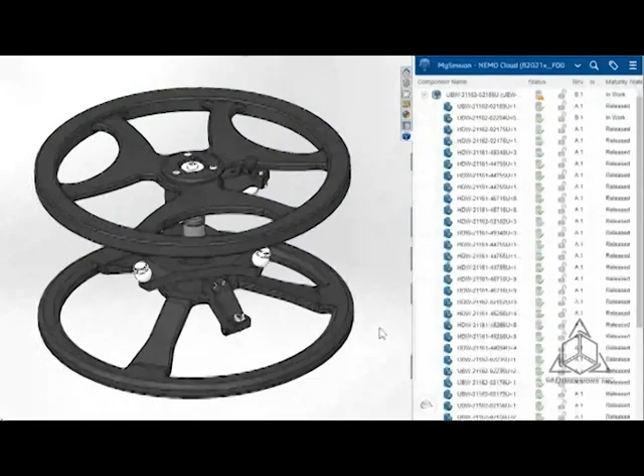This version of the subassembly is released. In order to make changes, Debbie needs to create a revision of the assembly and the hand wheel. The status indicators automatically show the current assembly structure is out of date, so she replaces it with new revisions and sets them to reserved. This gives her write access to the items she needs to modify without locking other users out of the rest of the assembly.

The redesigned hand wheel looks great, but she needs to update the drawing. The shared bookmark gives Debbie quick access to the related drawing files.

The drawing is now synced with the part file, so she saved it to revision B. Then sets the part and drawing to a frozen state so they can be reviewed. Returning to the assembly, she finishes out the design by adding the latch mechanisms and saves the new revision back to the cloud.

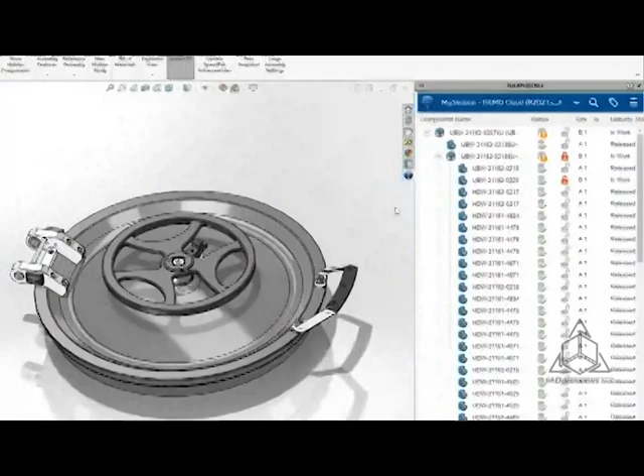In order to meet their tight deadline, the Nemo team often needs to work on the same design files at the same time. Eric is working on a newest revision of the master hatch assembly. These icons let him know Debbie has the hand wheel assembly reserved and is currently making changes. He can reserve the top level assembly without affecting Debbie's work on the subassembly. This modular approach to access control allows users to design concurrently without accidentally saving over each other's progress.

A short time later, Eric sees that Debbie has finished up. He just needs to reload the latest version of the subassembly from the server. Taking a look at the handwheel drawing, he likes her redesign and moves it to released.

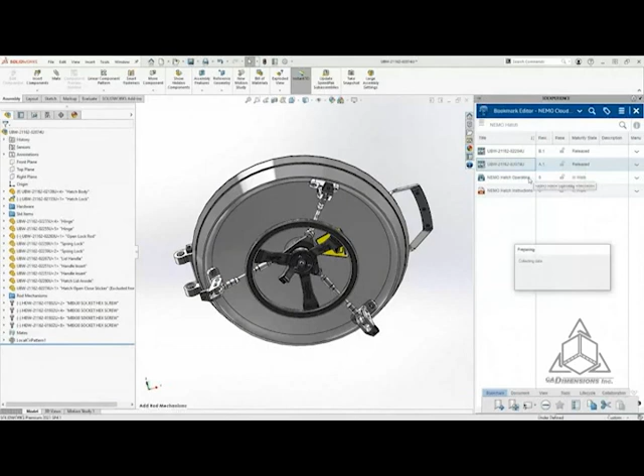Back in the assembly, Eric attaches the connecting rod mechanisms, then returns to his bookmarks to update the drawing. Bumping the assembly and drawing to revision B, he's ready to save.

The revised hatch assembly requires new versions of the supporting documents. From the convenience of the bookmark tab, Eric uploads the latest version of the Composer file and uses the interactive preview to inspect the latest revision.

Out-of-the-box cloud data management enabled the Nemo team to be productive right away. They were able to safely store their data, manage changes, and design concurrently without ever having to leave their familiar SolidWorks design environment. Everyone in the organization benefits when you connect SolidWorks to the 3D Experience platform.

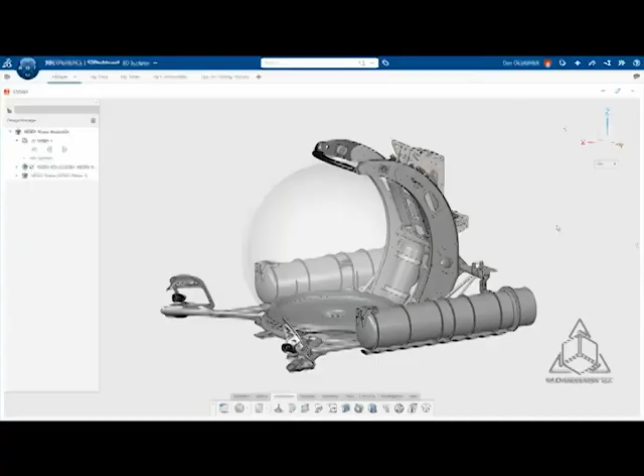Every concept design has a unique starting point. In this case, progress has already been made on the underlying frame assembly. These files were designed in SolidWorks and were readily available for reference right in the browser. For this concept, we'll turn on the hand sketches to make it easier to model. We begin modeling the Nemo body design by dragging in a primitive cube to start sculpting.

Subdivisional modeling gets its name from the loops of edges and vertices that surround the shape. The more there are, the more control. But like a spline in SolidWorks, it's better to start with less than more.

The main user input is the on-screen manipulator called the robot. The shape is always edited with respect to its position, so we can move it to the left edge to keep that side stationary. Pushing and pulling the geometry is the main interaction in sub-D modeling. The robot can be used to translate, rotate, and scale the shape.

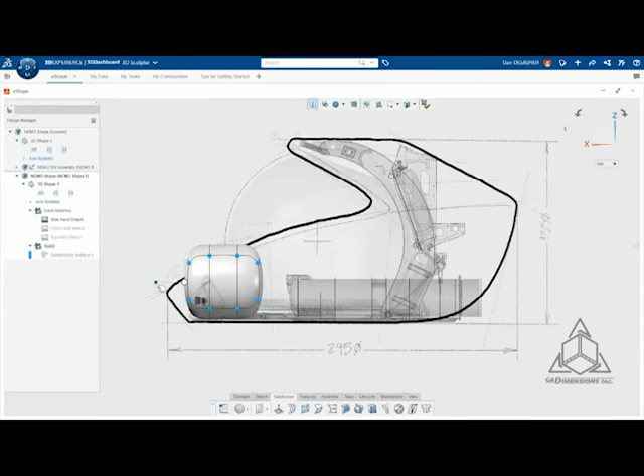The other half of the battle is selecting the geometry. Fortunately, in XShape there are plenty of shortcuts. For example, we can shift-select two faces to select those and the entire loop of faces in between.

By default, all faces have a C2 level of curvature continuity, ideal for any industry of product design. However, select edges can be creased at any time to enhance the style. In this case, by dragging the slider, we can adjust the smoothness factor applied to this crease.

We can use the touchscreen to draw a curve across the screen to influence the top row of vertices. Switching to the other orthogonal view makes it easy to size, shape, and position the first sub-D body right where it needs to be.

The robot can also be repositioned onto an edge. This way we can precisely control the direction of this translation. Precision can also be applied to the length of this translation. An on-screen ruler appears to snap to an exact dimension.

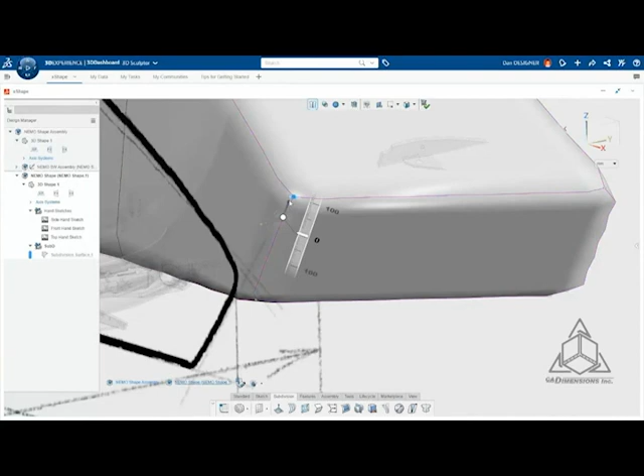We'll make a few adjustments by pushing and pulling at the two ends. Now that one side is done, we're ready to move on to the hood.

To add more material, we can slap on a virtual chunk of clay using the extrude command. After pulling some faces over the center plane, the plane can be used to apply symmetry. As long as the symmetry option is active, all modifications will be replicated from side to side.

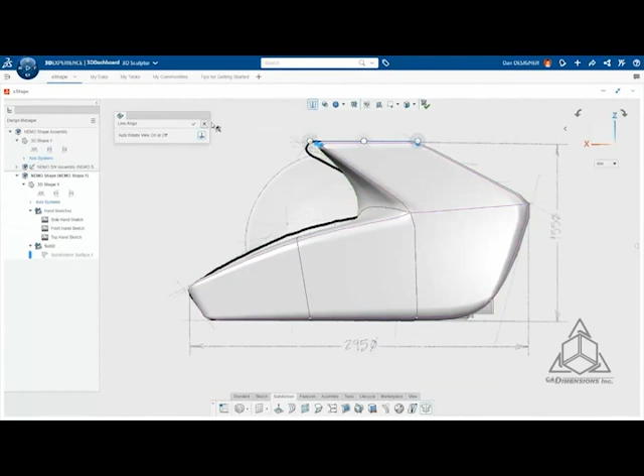To ensure the hood of the Nemo is perfectly flat, we can align the entities to a line. Moving its endpoints will translate and scale the entities while snapping them perfectly to a horizontal orientation.

Now that the general shape has been roughed out, we can focus on adding a few finishing touches before sending this out for SolidWorks. Here we'll add two horizontal loops to the midsection to make way for the hole that will travel through it. Because loops are such a common command, they're easily accessible from the context toolbar, a user interface feature every SolidWorks user can appreciate.

This vertical loop will provide a boundary for the hole in the back as well as a scoop on the bottom. To create the hole, the extrude tool can be accessed from the context toolbar while two opposing faces are selected.